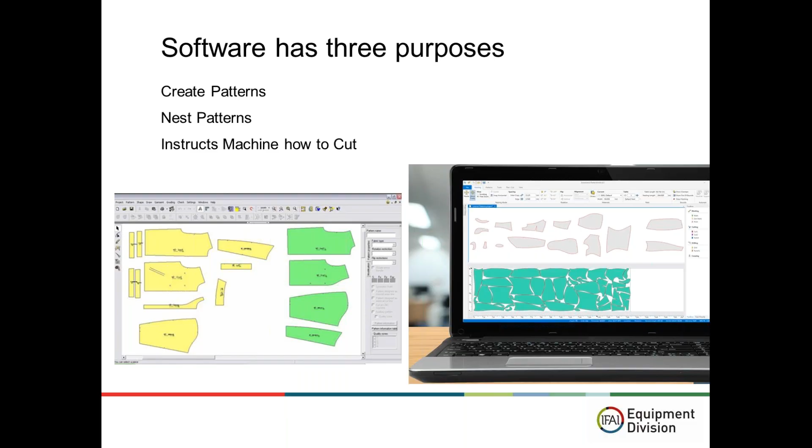Those are all important questions in finding the right solution. And although cutting machines are the meat of the investment, and that's what's driving your return, the more meaningful conversation to start at is how you guys are patterning and designing your products.

In a standard shop that hasn't automated, it's a labor-intensive manual process. And the more complex the pattern, the more time it will take, and the more likely it is that an error will be made.

And when it comes to patterns within IFAI, Eastman and Autometrics, we've seen them all. We have the tarp manufacturer that needs to pull the whole roll of fabric, cut to length, and it could be as simple as a rectangle. We've seen the retractable awning manufacturer that needs to cut the same trapezoid over and over, but just in different sizes. And then there are the very dynamic patterns that will eventually turn into, let's say, an inflatable, or a piece of furniture, or a piece of apparel.

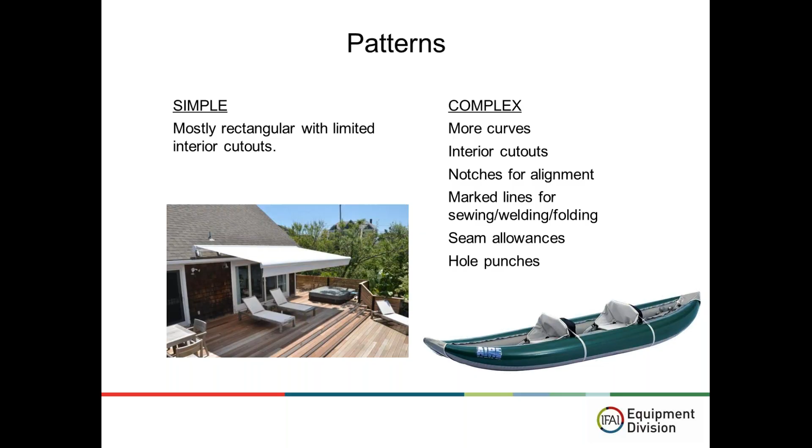And then to add another layer of complexity, we have our friends in the awning, marine, and many other industries in IFAI that serve a very custom client base.

So in order to talk about how we can improve in the cutting room, we have to consider how you're making patterns now and the best way to transition from there. I've seen many customers not make patterns at all, so every piece of manufacturing is on the fly. This is typical of a very experienced cutter that has all the nuances and knowledge and memory because they've been doing it for 30 years.

Second, in a more detailed fashion, many fabricators in different IFAI markets will have a library of paper or plastic templates. These templates are created by draping paper or plastic over what you're needing to cover, then taking that template, tracing it over fabric, including all the grommets, all the marks for sew lines or darts, and then taking a pair of scissors to cut out that fabric. After all that's done, you keep the template in case you ever run across that job again.

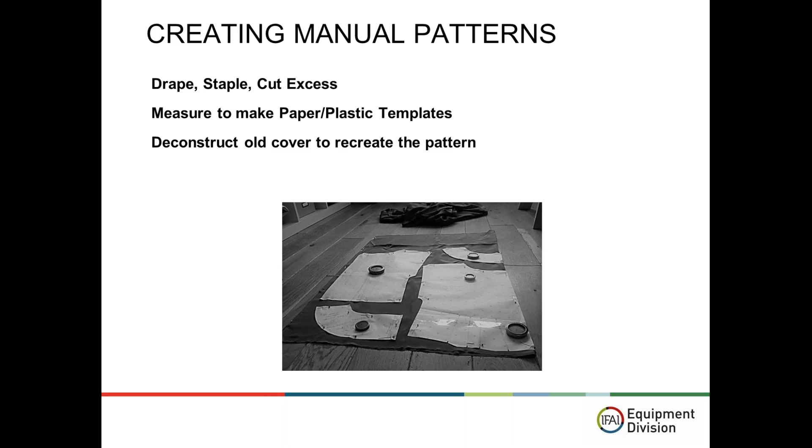So after years of being in business, your cutting room will eventually consist of rolls of material, your cutting table, and a wall full of templates. A lot of people get to this point. Then in the event of a recover, you take that old cover and use that as a template or pattern. This is common in upholstery.

Let me get there. So that leads us to digital patterns, to segue from the last slide in the shop that has the wall full of templates. Digitizing software and hardware is the tool that will improve many parts of your cutting room.

Digitizing can be found in many forms. There are string measuring equipment, there are plotting tools, there are photo digitizing tools that use nice DSLR cameras. Our smartphones are even powerful enough these days to digitize your patterns. The basics of digitizing are to take an existing template and turn it into a digital pattern ready to be cut on an automated machine.

Second, there are endless options for CAD software capable of designing products in IFAI. Most of you have heard of AutoCAD or RhinoCAD or SolidWorks - that's what I'm talking about here. CAD stands for Computer Aided Design. Many of you are using some form of CAD currently from what I saw from the polls.

How the cutting machine companies in IFAI can help here is determine if there is a dedicated software for your industry or product. And if your product is extremely unique or AutoCAD is your only option, we can help with the best way to integrate our software running the cutting table to the software that you're using to make your current patterns. And then the last method I wanted to point out is using equipment that uses distance to the device to measure in a 3D space.

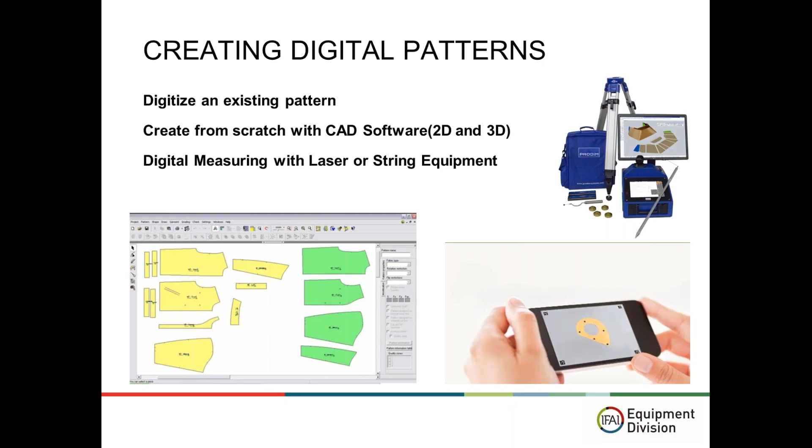So after you create your pattern in a digital form, and before you send it to an automated cutting machine, there's a process called nesting. This can be done manually, typically if your patterns are very simple, but to see the best results, software will help you automatically nest all your patterns in the quantities you instruct.

So let's say you're making duffel bags and you have an order for 100 of them. Auto nesting works within the software that runs the cutting table. It grabs all the panels required to make a duffel bag - it could be 3, it could be 10. It multiplies it by how many duffel bags you need to make, in this case 100. And then it places it on the virtual view of your cutting table to best use the material that you're paying so much for.

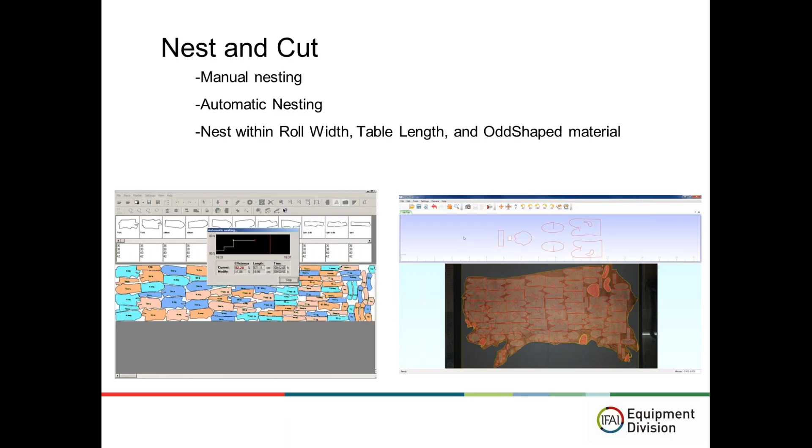So now, what do you do with your patterns? You have to cut them out somehow to get them ready for sewing or heat sealing. And again, all the methods fabricators can currently use to cut fabric.

Everyone has traditional scissors. Everyone started with that method, right? An Olfa style tool is a rolling blade inside of a holder, very similar to a box knife. There are spinning blades made to get through tough material, and even oscillating cutters to get through stacks of material.

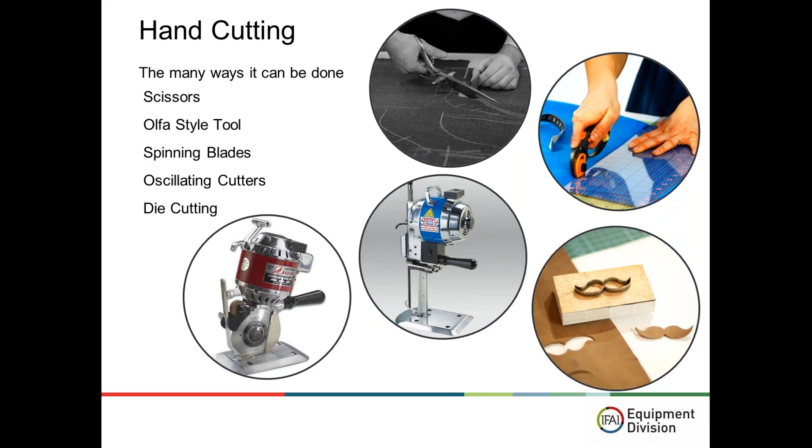Mainly what we wanted to discuss with you in this equipment module is automated cutting. Some people call it a plotter, some people call it a cutting table, a cutting machine. This is all referring to the cutting machines you see within IFAI cutting your unique pattern.

It's an automated gantry driven by software that manages your pattern. The material is held in place on a vacuum table while the gantry cuts the patterns so that you don't have to.

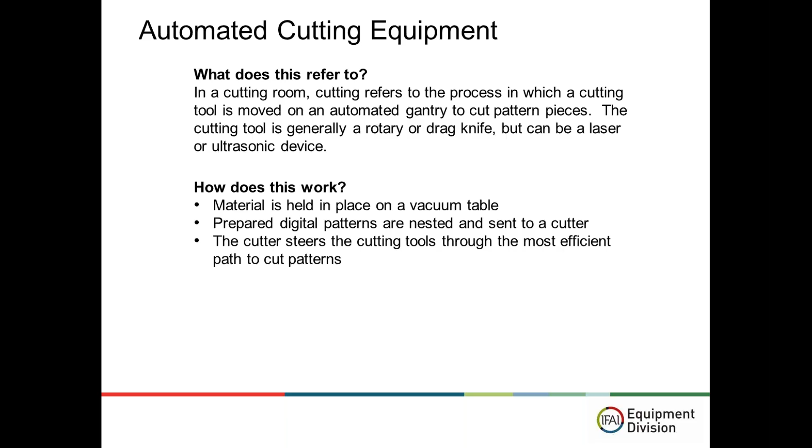Cutting machines are made of two main parts. There's the moving gantry, and the motions are described in axes. X-axis is the width of your fabric. The Y-axis is the length of the table. And theta axis is extremely important. That's the direction in which the blade is traveling. More so, it's how the blade steers as it's going around your pattern.

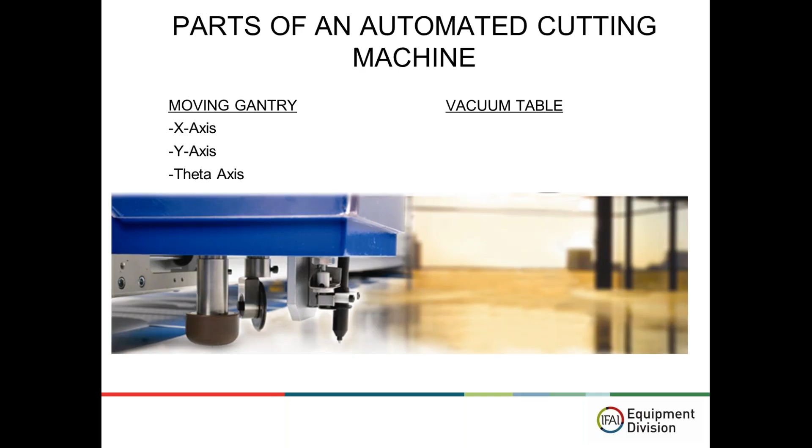And then the second main part, self-explanatory, of the cutting machine is the vacuum table, which supports the fabric you're using.

So diving into the gantry, which is the most visible part of the machine since it's constantly moving to cut your fabric. The gantry can be described in two major parts, the drive system and the cutting head. And the most important part of the gantry is the active cutting head. It carries the blades, it steers them to cut whatever pattern is sent to the machine.

Most machines use pneumatic actuated tools to engage and disengage the cutting. The cutting machine is driven by motors with either rack and pinion or some sort of belt drive. Ultimately, the machine is only as accurate as the parts it's made of and how accurate the drive system is.

The motors can be stepper or servo motors, but either way, if the motor says that it moved X distance, the pinion or the belt on the drive system determines how accurate that move ended up being. And then also keep in mind that any flex in the system also translates into loss of accuracy.

So this is a little bit more technical of a conversation instead of it being an application discussion. But I'm giving you this information for you to be critical of as equipment manufacturers. So when you're shopping around for equipment, check their tolerances, ask detailed questions about how the equipment holds up over time, ask about common spare parts, and of course, ask for a reference to make sure the ownership experience lives up to the manufacturer's claims.

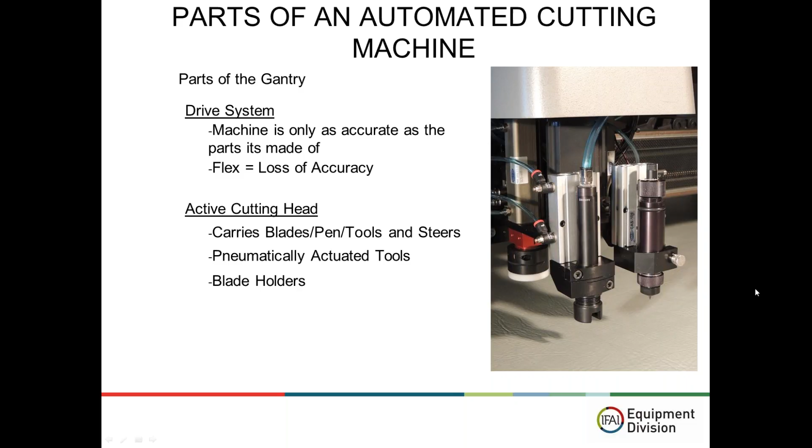So back to the cutting head. The cutting head can carry many different kinds of blades to take care of the details that you need in your pattern. Cutting tools that you will see in IFAI are round rolling blades and drag blades.

These blades come in many different sizes and are made of many different variations of metals. Consult with Autometrics, Eastman, or any other IFAI cutting equipment company to make sure that we match the right blade for your material and the complexity of your pattern.

The other tools that can be on a cutting head are punches, notch tools for sewing alignment, pen holders that can hold chalk pencils, space pens, ballpoint pens, Sharpies, and then even printing tools for marking, such as dot markers and inkjets. The pen tool and inkjets are very useful to most fabricators using cutting equipment.

This can be used to print a job number, a part number, a barcode to integrate with your production software, or some details that may be important for your sewer or your heat welder as they're fabricating the product.

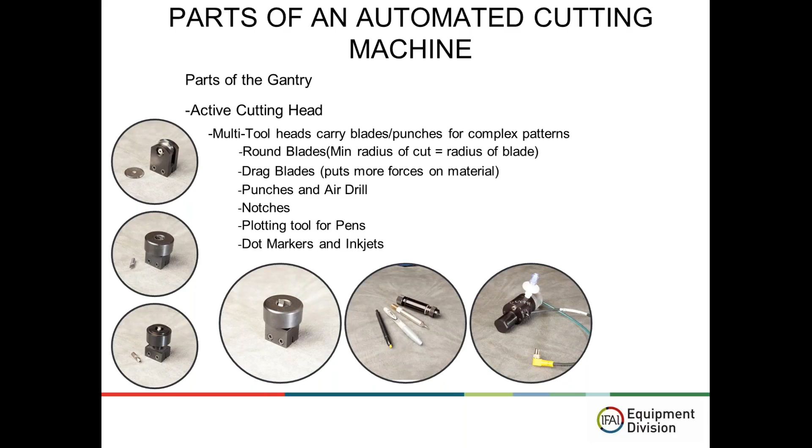You'll find that the width of cutting tables cater to the typical material width that you'll find in the market. So purposefully, we built tables that are made to handle 60, 70, 80, 96, 104, 119, and so on, wide materials. And the length of static tables are virtually limitless. But a common size in IFAI is a table in the length of that 20 to 40 feet.

A rule of thumb we use to help customers find the right length table: 80% of your patterns are within this length. Of course, we know fabricators in IFAI take on custom work every day, so you may never find the perfect length of static table, but we try to help marry any restrictions in floor space with your production volume, your pattern size, and respecting your budget to find the right width and length configuration machine.

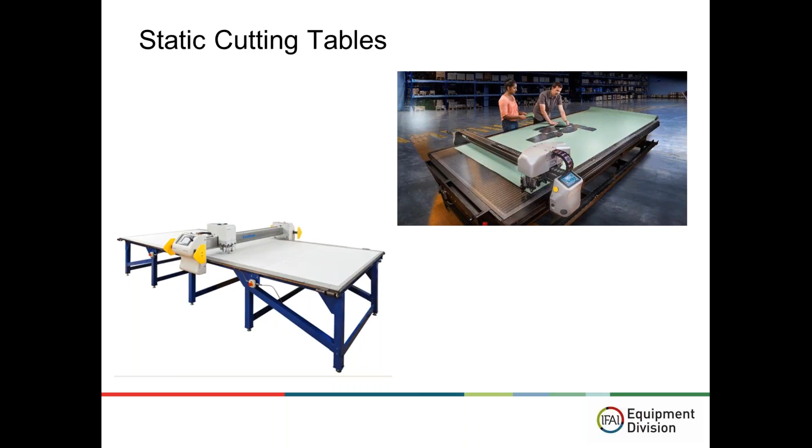Conveyor tables are the other category of automated cutting machines. They use a similar gantry as the static table, but the vacuum table is a driven belt. There are quite a few positives in this type of system. If you can imagine loading a roll of material and then within the software, auto-nesting 20 tables worth of patterns, hit start and watch this thing run.

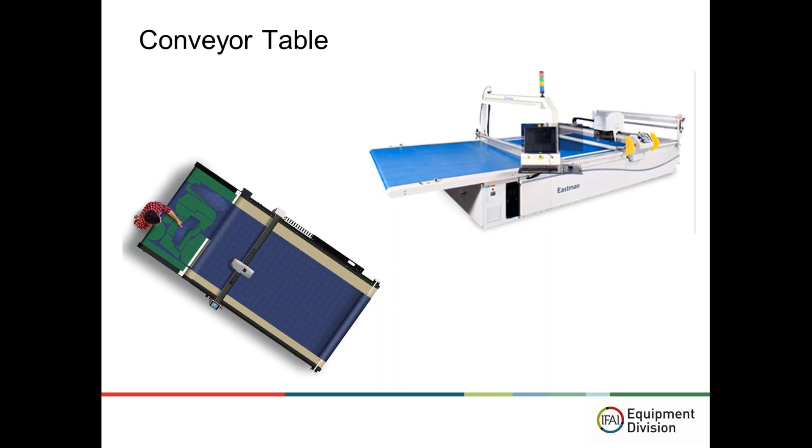So all your operator has to do at that point is stand there and pick off cut parts. The intent behind the conveyor table design is for high volume throughput, but this also draws clients that have restricted floor space. Conveyor tables are engineered to accurately cut patterns that may be larger than the length of the table as well, so you're getting fully automated material cutting and takeoff in a smaller footprint.

Time savings is an obvious one. Software and equipment helps you lay out your templates faster, and it certainly cuts faster if you have yet to automate. Being conservative, the number I like to provide to customers is that 1 hour of automated cutting is equal to 8 hours of hand cutting. And again, that's a very conservative number for us equipment guys.

Material savings is the other major component of ROI. Most companies report a savings of 10 to 40%. This is a direct result of nesting your patterns within the software. It's also a function of increased accuracy. It reminds me, I was told by a customer once that their material supplier thought they were buying from someone else, but in actuality, they were just scrapping that much less material in their first year with automated cutting and software.

Next is increasing accuracy. Increasing accuracy and error elimination go hand in hand. When you automate, you don't have to rely on your employee using old patterns or laying out the template by hand and then cutting it correctly. There are plenty of potential problems with this manual model.

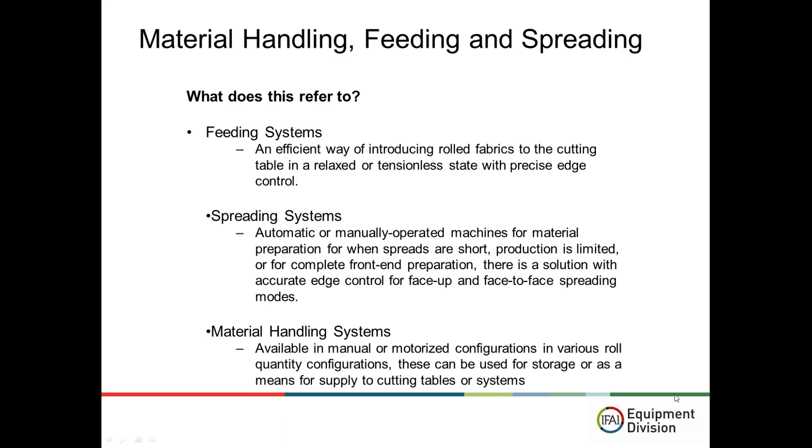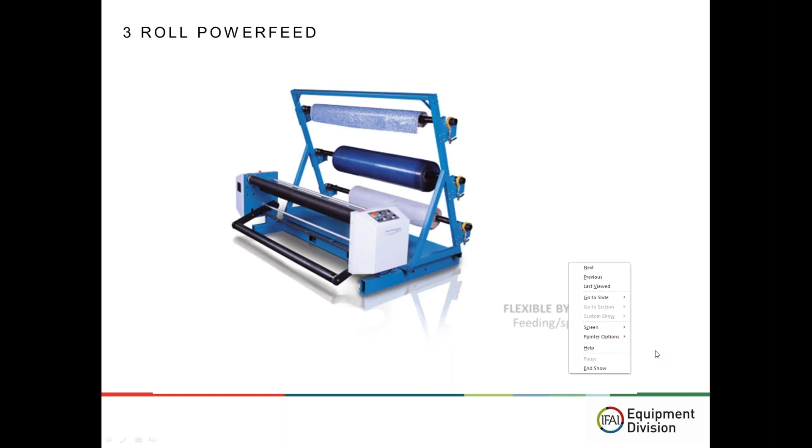Many in the industry have a cutoff knife for flaws or for face-up spreading. They can also have turntables and other options such as barcode scanners, flaw removals, Wi-Fi capabilities, machine diagnostics and maintenance prompts, step layer capabilities, file management, and also management reporting.

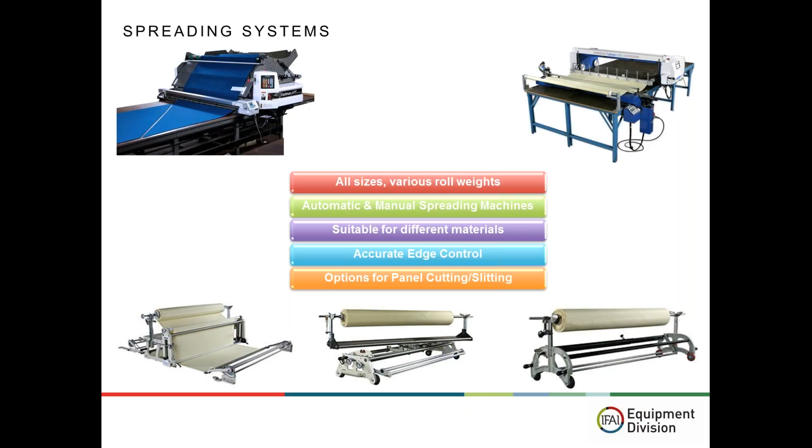There's three types of spreading, and it's all dependent on the material that you're cutting. You have face-up spreading, which is each layer laid face up with the grain or pattern running in the same direction. A knife box is always required for this because the spreader will go down the table, cut off the spread, go back to the original position, and spread again. It is the least efficient way to spread because you're not spreading in both directions.

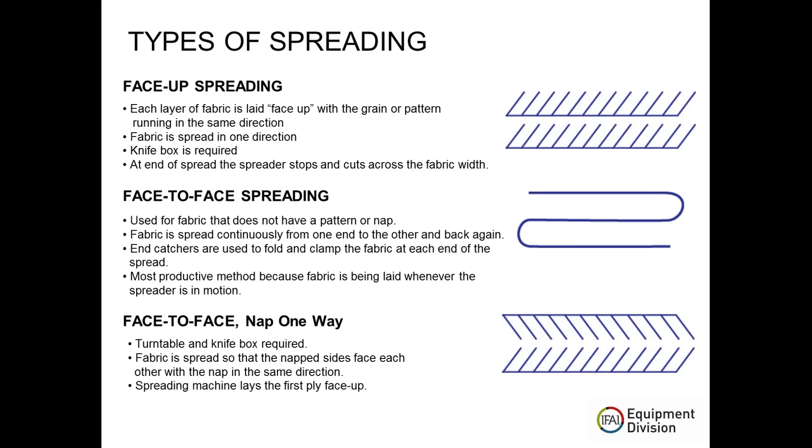There's also face-to-face nap one-way spreading, and that also requires knife boxes. Fabric is spread so that the nap sides face each other. So for example, on corduroy, it would be spread face-to-face so that the corduroy is facing each other. It's good when you're cutting, say, a pair of pants that you want the exact opposite, so they're symmetrical.

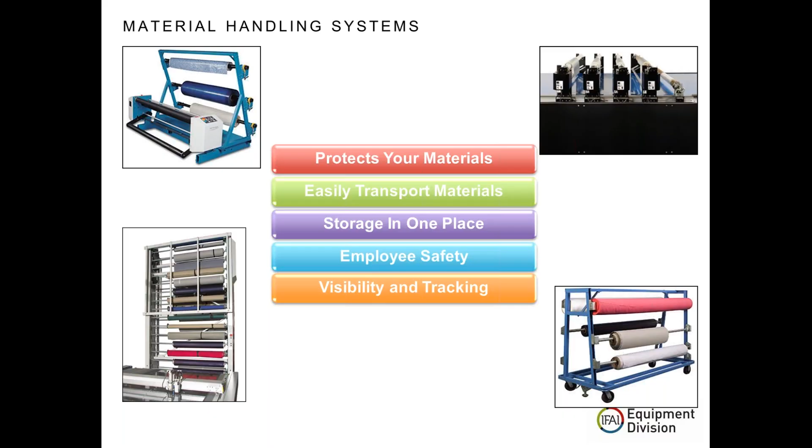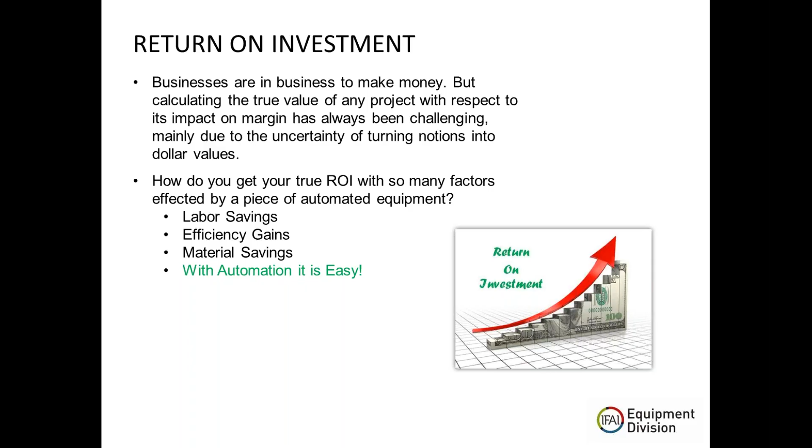If you're thinking about automating or getting a material feeding or spreading and feeding device, you want to look at your return on investment. Obviously businesses are in business to make money, but what do you look at when you look at an automated machine? How do you determine your return on investment? There's labor savings, efficiency gains, and material savings. With automation, it's fairly easy to see what your payback is going to be on your machine.

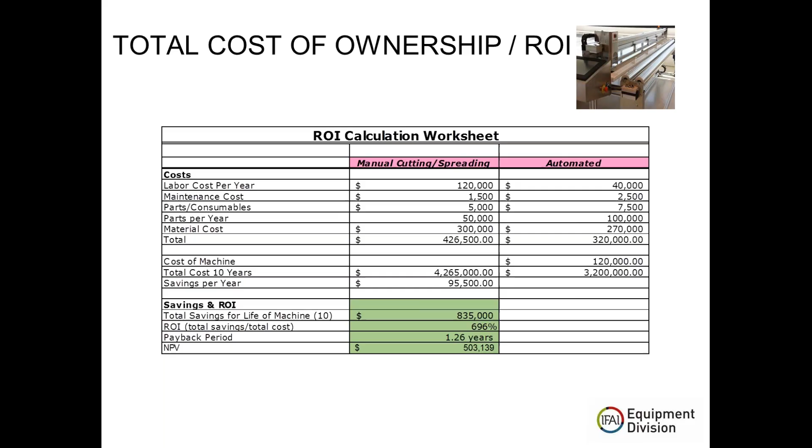That gives a total yearly cost of $320,000. Using straight line depreciation and a salvage value of $10,000 on the machine over 10 years gives a savings per year of $95,500. As you can see in the green, all those numbers look like a pretty good investment — $835,000 savings for the total life of the machine, a return on investment of 696%, a very quick payback period of 1.26 years, and a net present value of $503,139.

This is an example — it's somewhat rare and maybe extreme, but it's an example of a customer that went from manual cutting to automated cutting. When manually cutting, they used 10 employees at $20 an hour, working 2,000 hours a year, for a total of $400,000 in labor costs. They bought an automated machine, used 2 employees at the same hourly rate and same hours per year, only $80,000 per year in labor costs — a savings of $320,000. So they basically paid for the machine in half a year. Rare, but doable.

That is all I have on material feeding and spreading and return on investment. I appreciate everybody that joined the call today.